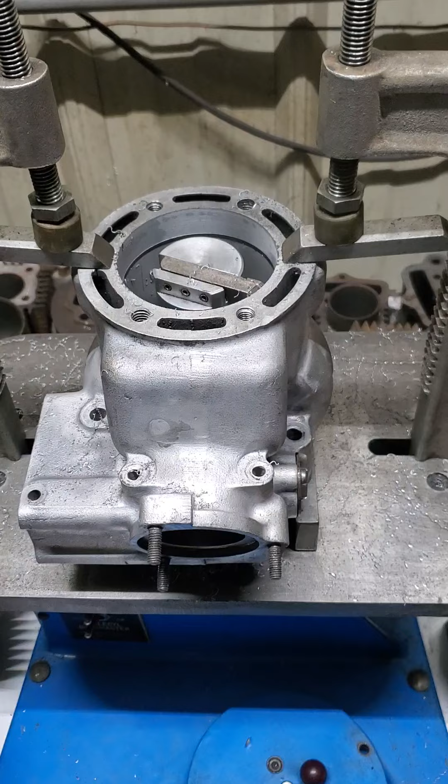Hey folks, back at the boring bar, performing a machine work task on this one that's a little bit more involved, putting a sleeve in it. This is supposedly a 1987 Quadracer. It's an LT250R, and I am at the point now of just about being ready to stop boring the aluminum

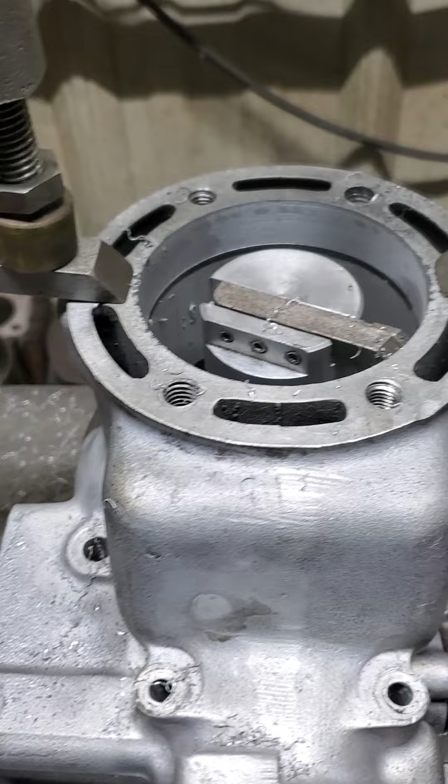and start. I'll set it up in the mill next and cut the counter bore, which will be back into about there. It's about 200 thousandths deep. I'll explain what that means in a second here. But that holds the sleeve into place. And you can see a dark spot down in there.

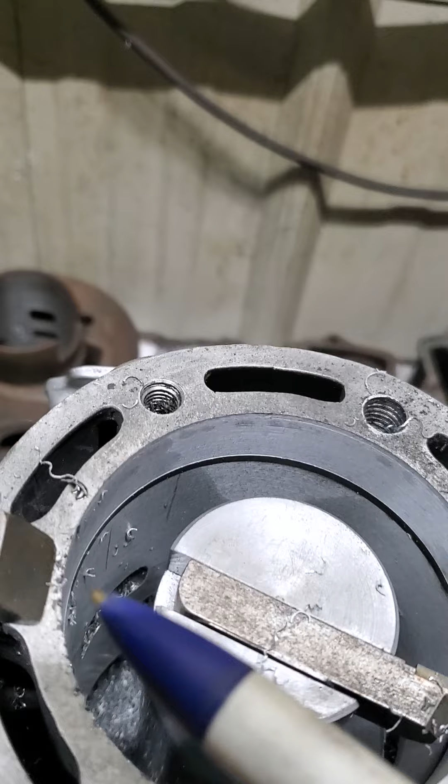So with these cylinders, and this cylinder also has some other issues. That guy and that guy, that's been helicoiled. That one's been helicoiled. Can't see the two underneath my hold down clamps, but there's three of them I got to fix.

And this is a young man's pride and joy. I don't know if he races this or what he does, but I get a few of these mostly in the winter because sleeve jobs are very time consuming, take a lot of operations to do them, and that's just how it is.

But anyway, that dark line you see is actually part of the old sleeve. And these are made, they call them an integral sleeve, cast. The block is cast around the sleeve. So in other words, this is the sleeve that's going to go in, and it's an LA sleeve. You can see the side view, and that I've illustrated here.

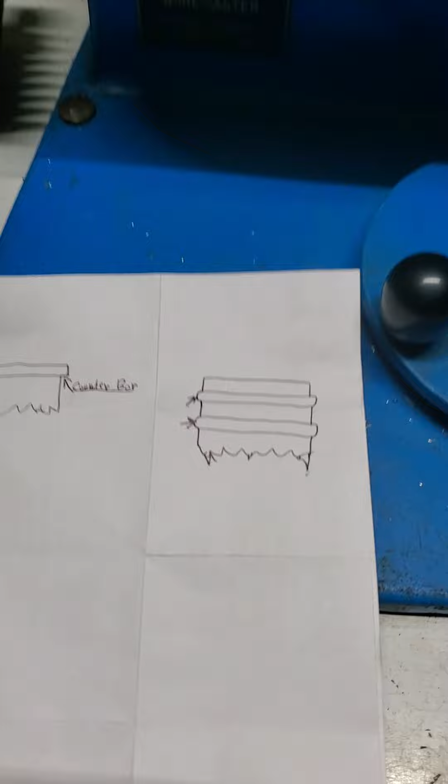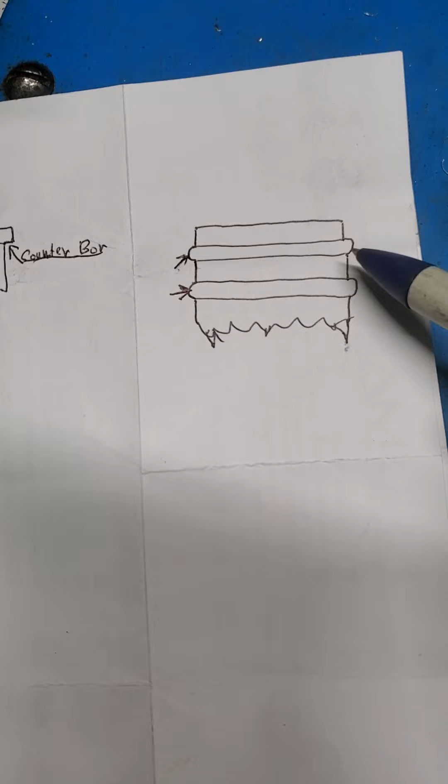You do a counter bore in this aluminum top part of the casting that I just showed you. There'll be a counter bore to accept that flange. Well, from the factory sleeve, the casting actually has like a big raised area here and there, and that's the one you're seeing. The top one's already been machined out.

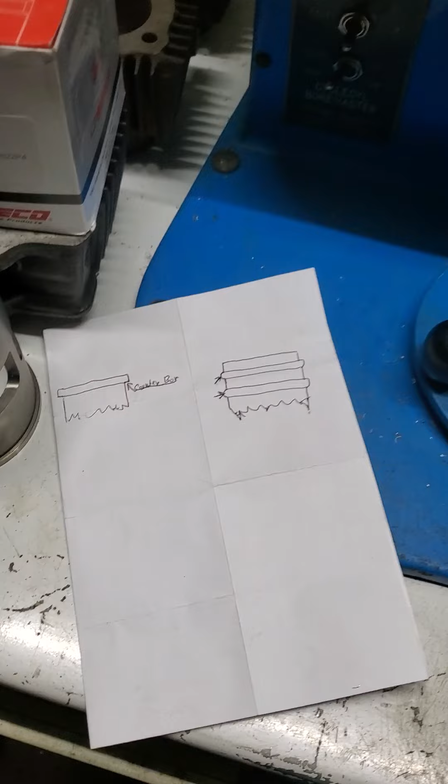There's some chunks, I don't know if you can see them, they're down in there, that just came out of that area. They were about 1/4 of an inch wide. But yeah, that's typically how they're held in from the factory. And then the rest of the sleeve is loose, and I'm not sure their operation and how they do it, because when you machine these things, part of the sleeve comes out in chunks.

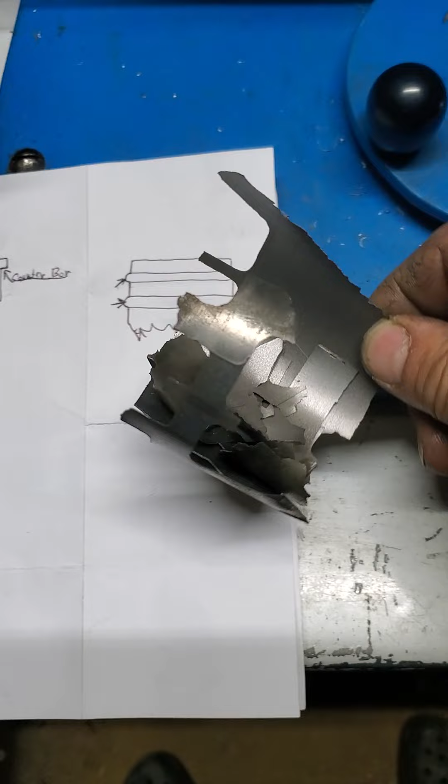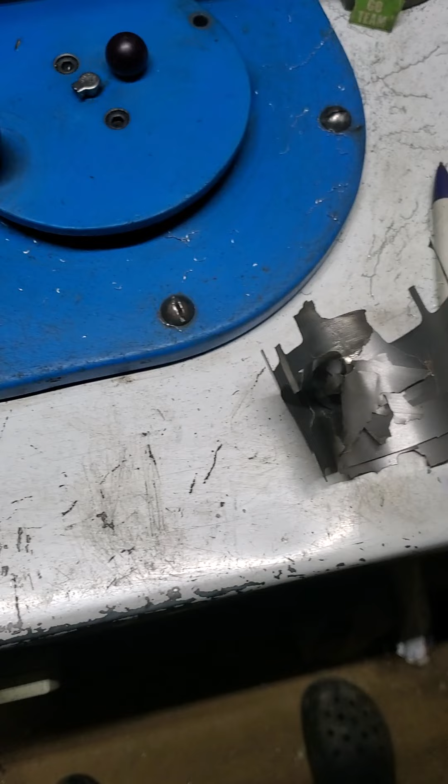You got to be careful it doesn't bind up and wad up your cutter and make all sorts of nasty grooves. So when it gets close, I cut those out and peel the sleeve portions out of them and try and get it out to the aluminum as fast as I can and finish the final OD size to accept that sleeve. I believe that's about 3 thousandths interference fit is what we'll put it at.

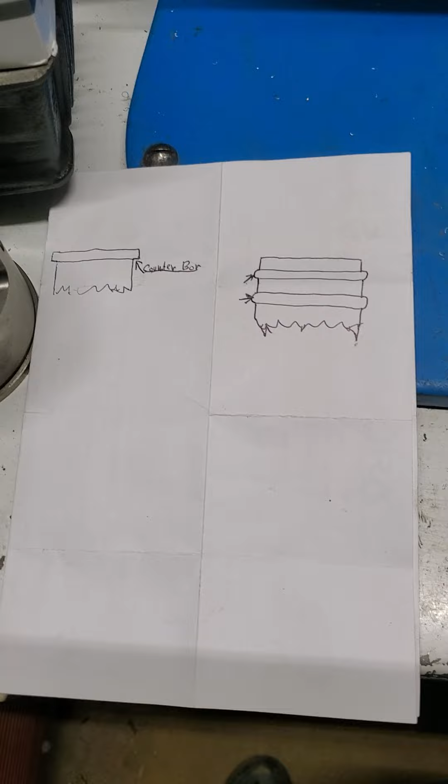I don't press them in. I'll heat that up. I'll put that in an oven. I'll put that in the freezer, and I make some marks on them and line them up and drop them together. So that's the easiest way to do it.

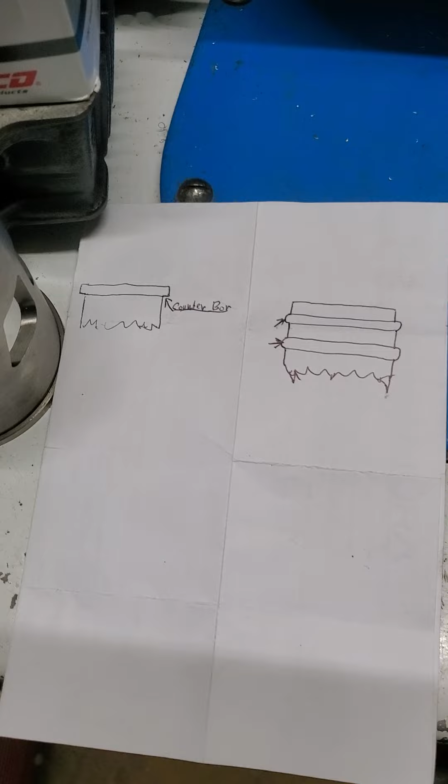You know, just basically doing this video to show, if your buddy says, hey, I can press that old sleeve out and press the new one in, don't let them do it, because what'll happen is those ribs right here that are cast into that sleeve will blow the top of this right out. It'll be junk. I've seen it happen. Be real mindful of that if you're going to put a sleeve in something.

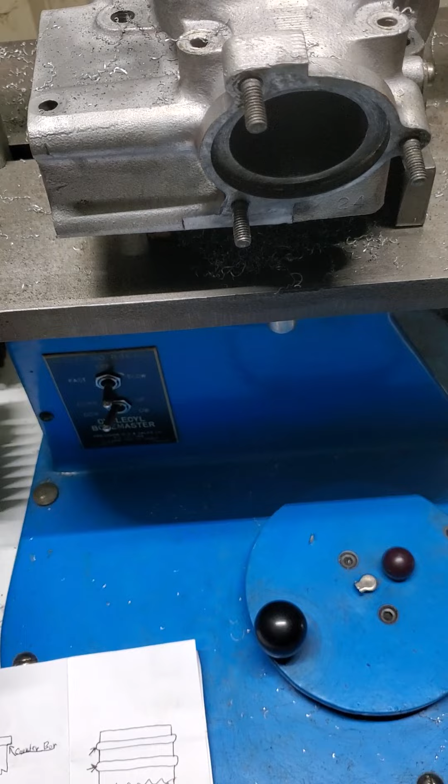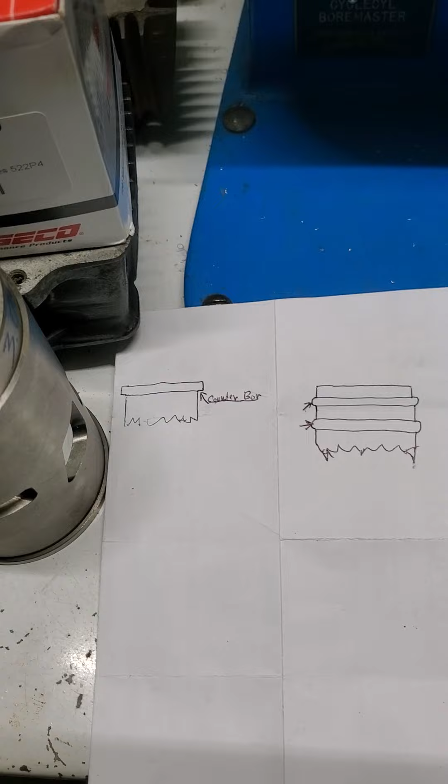A lot of the 4-stroke stuff out there has a replaceable sleeve in it. You just press them out and press the new one back in. This 2-cycle stuff, a lot of it, well, Suzuki anyway, has done that. A lot of other manufacturers, they're an integral sleeve as well. That means, again, that the casting is made around the sleeve. It's all done in a jig system when they pour it and make the casting. So it's got to be machined out, basically.

You'll have to send it somewhere if you don't have a boring bar yourself in your living room. I just happen to have one in my shop because I thought it was a good thing to have as an addition when I did this as a line of work 20 years ago. I wanted my own boring bar so I didn't have to wait for machine work. And now I solely do machine work for people, and that's it in the shop. I don't work on anything else.

So done a lot of these over the years, sleeve jobs, I don't know, 40 or 50 over the years, somewhere in there. Just boring cylinders oversized, hundreds. So done a lot of it. This old machine's paid for itself.

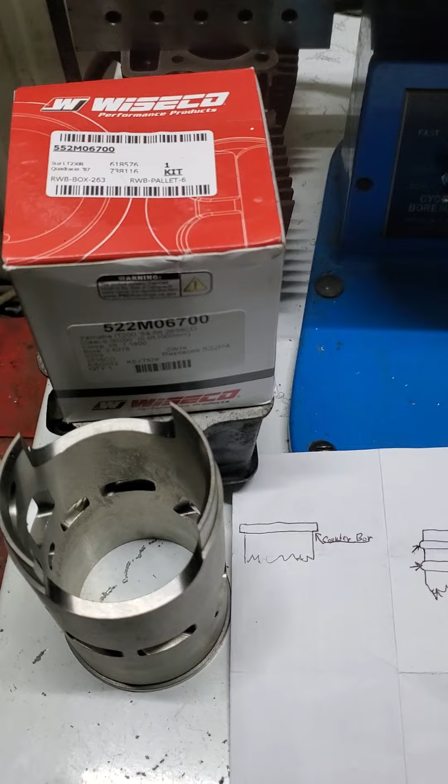Anyway, that's what the video is about. This is an 87 LT250R Suzuki. If you have one of these and you're going to oversize it, that's great. If you're going to try and sleeve it, this has to be done.